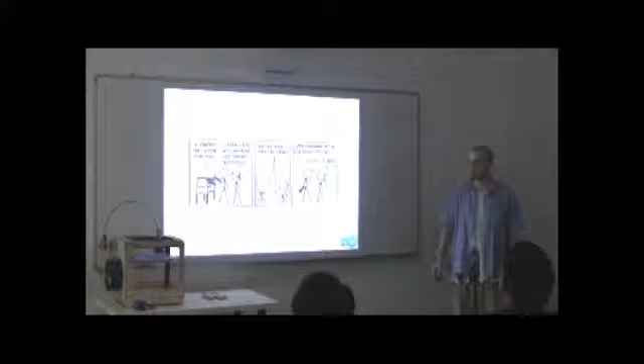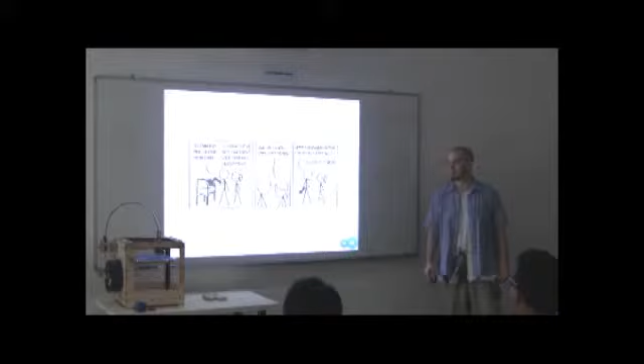On 3D printing, so I decided to essentially give everyone a crash course on what it is, the steps involved, and also the technology.

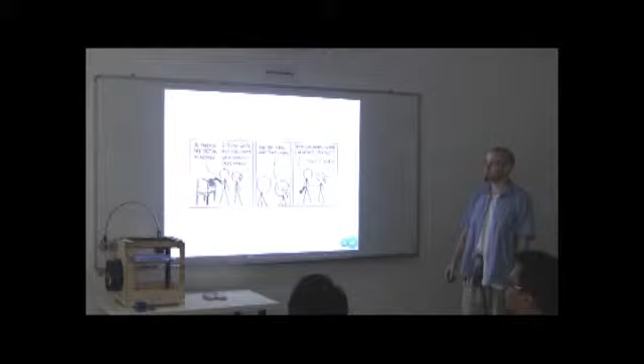Alright, so I thought we'd start with an introduction to 3D printing in case anyone doesn't know what it is. What's a bit older? Talk a bit louder. Sure.

Alright, so I wanted to give a quick introduction to what 3D printing is and why it's actually interesting, why it's relevant.

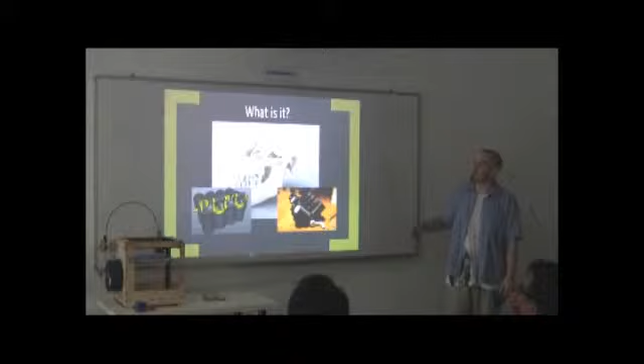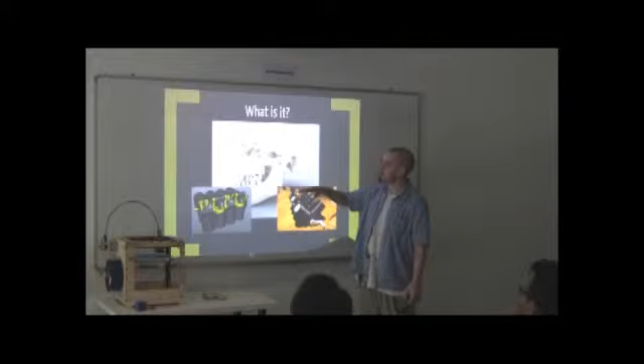So essentially 3D printing is the process of additively building a 3D model, typically out of cross sections. So we'll start off with a 3D digital design, something like the skull, and we'll build it up layer by layer. So here you see a skull which essentially isn't complete.

So it allows us to take 3D digital models and make physical copies, which is really useful for a lot of industries.

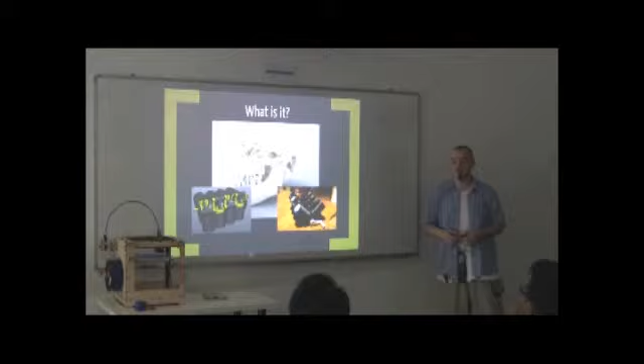Are those wood? They're wood, yeah, all of those. So CNC machines look very similar - they have some kind of cutting device to essentially remove material out of the block. It's just the opposite of additive.

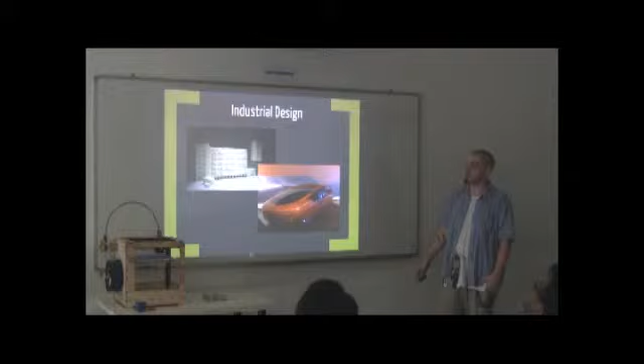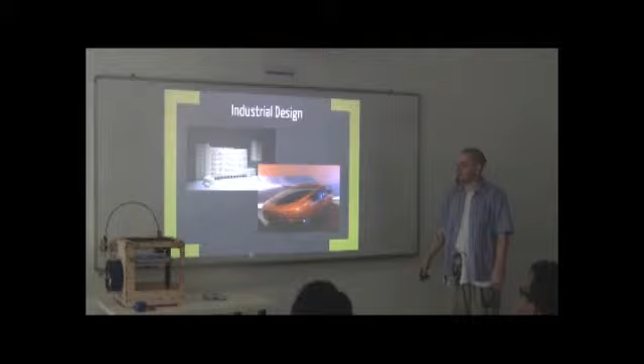So what's it good for? Well, industrial design was one of the first industries to adopt the technology. It's very common for architecture and also automotive design. Obviously car panels have lots of funny curves and stuff, so they're difficult to manufacture using standard techniques.

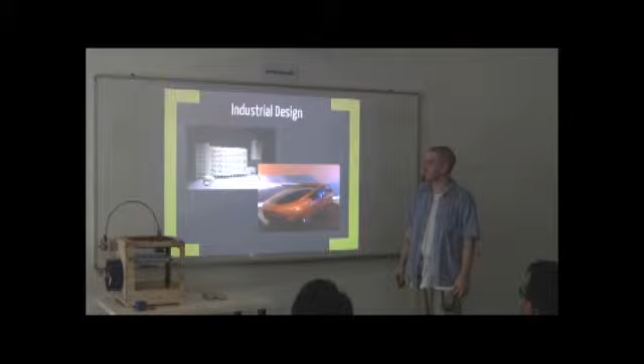So coming up with prototypes like this car, which is entirely 3D printed, is relatively straightforward with this technology.

What are the advantages of using a 3D printer versus whatever tools they used before? Essentially time. If you're wanting a short run, rapid prototyping, a 3D printer can turn it out in an afternoon.

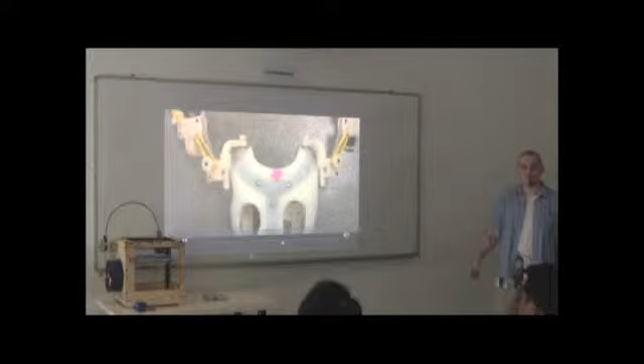Yeah, essentially as needed - it's not a large scale fabrication technique. If you wanted something where you want 10,000 pieces, 3D printing is not the way to do it. You can do something like injection molding, but if you want one injection molded piece, you have to pay thousands for the mold, and it takes weeks. So it's not a good way to test things out.

An example of replicating parts - the other day our 3D printer broke down, so Jeremy used the 3D printer to print a part for it. There's actually a clip back here which broke, and I replaced it with a printed part. I essentially jammed it in with hot glue just so I could then print that part and replace it with the actual thing.

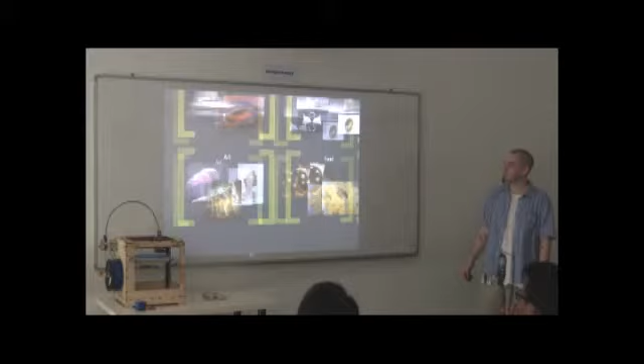So next we have art, obviously. 3D sculptures, characters from 3D digital models, all very cool. Food. Food is the interesting one.

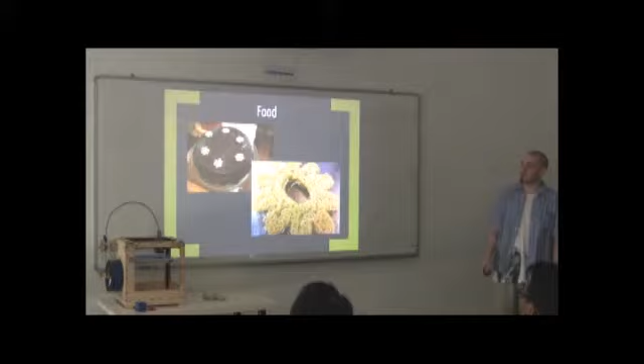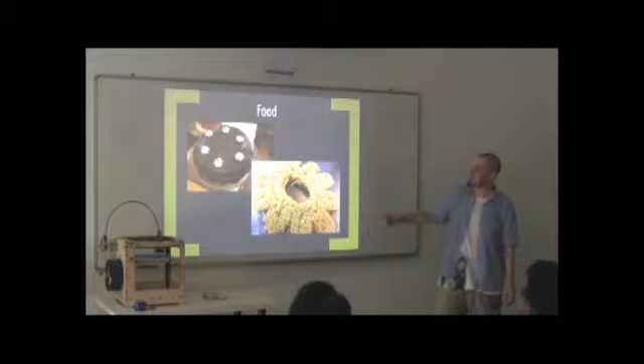So that's essentially a very quick overview of what 3D printing is, what it's used for currently. Next I wanted to give a quick overview of where the technology came from and also where it might be headed. As with everything great, it started in the 80s.

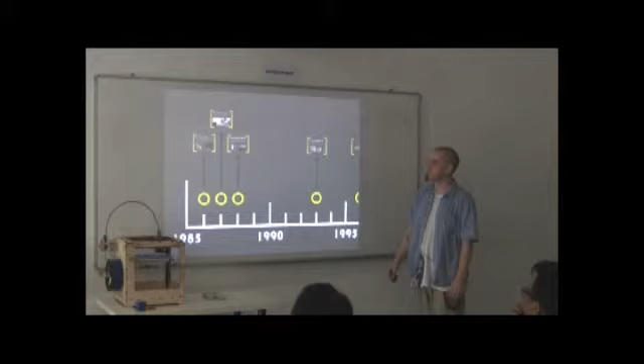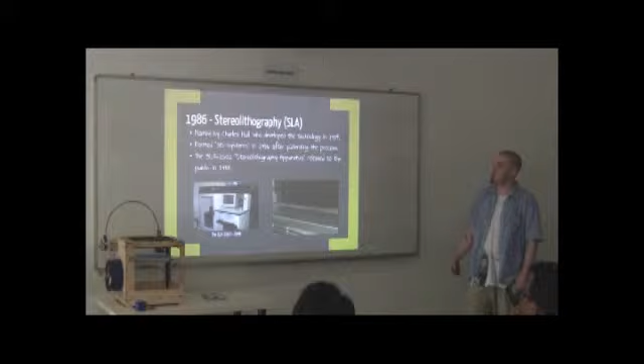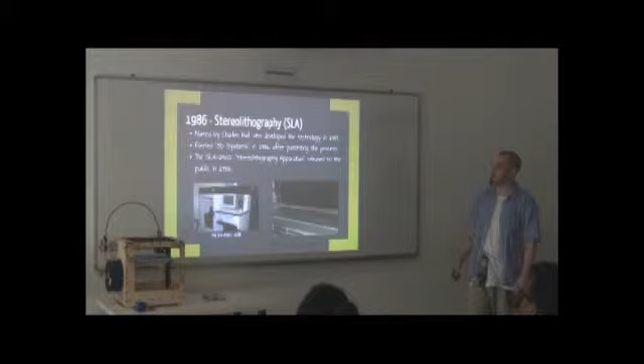In 1986, stereolithography was invented. It was developed by Charles Hull in 1984 and patented in 1986. He then went on to form 3D Systems, which is actually still around today, so we're using their printers. Based on a lot of feedback from their early test printers, which they only released to very select clients, they came up with the SLA-250, released in 1988, complete with an 80s computer and CD-ROM, of course.

So essentially stereolithography is a process which uses optical light, a UV laser, to selectively bond a UV reactive material. The material is laid out in liquid, and the laser then passes over the liquid and selectively bonds it wherever it hits. So it's a fairly expensive process.

There's obviously a lot of moving parts, and the material is expensive, so there are drawbacks, but it was still pretty good. Here we see a completed model - these are the areas that have been hit with the laser coming out of the liquid. It's also special lighting, because obviously you don't want UV to cure the edges, otherwise nothing comes out. These are automotive parts, car panels.

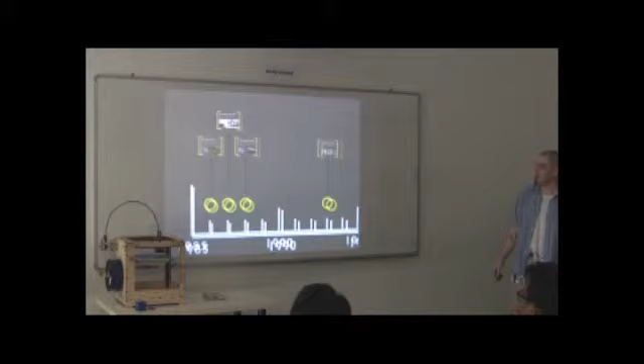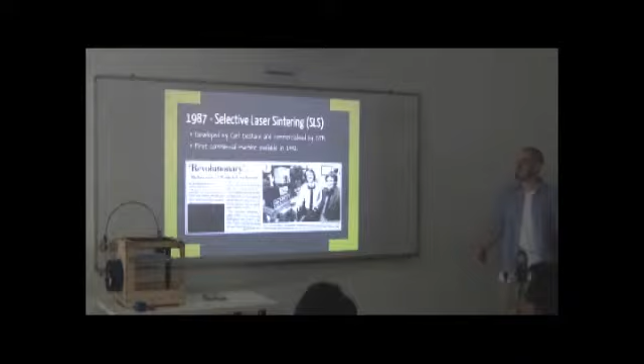Then in 1987, we ended up with selective laser sintering, done by Carl Deckard, this very small-looking chap. They produced the first selective laser sintering machine in 1992.

So laser sintering uses some kind of powder, and it essentially selectively melts the powder layer by layer using a laser - in this case, a carbon dioxide laser. It just creates layer after layer, which then fills up over time.

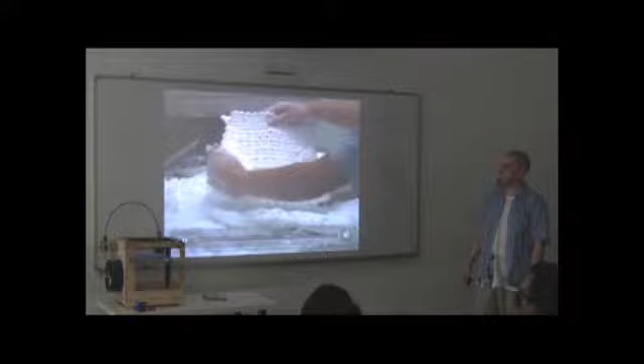Because it's in a powder, it's really good because you don't need support structures - essentially the remaining layer of powder, bonded or not, serves as support for the bond. So you just remove the bonded bits out of the powder that hasn't bonded, shaking all the bits out. Then they use something like compressed air to remove any excess powder from the mold.

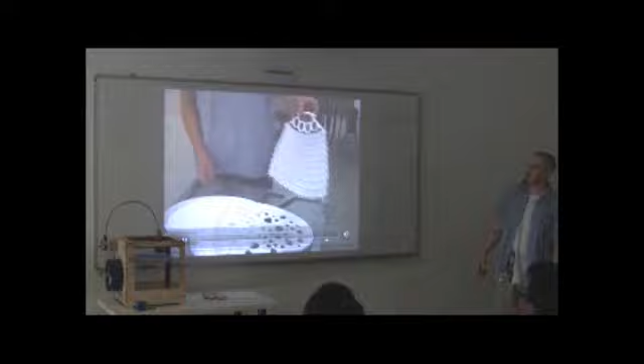And in the end, he ends up with a very sporty looking handbag. Just in case, for the woman.

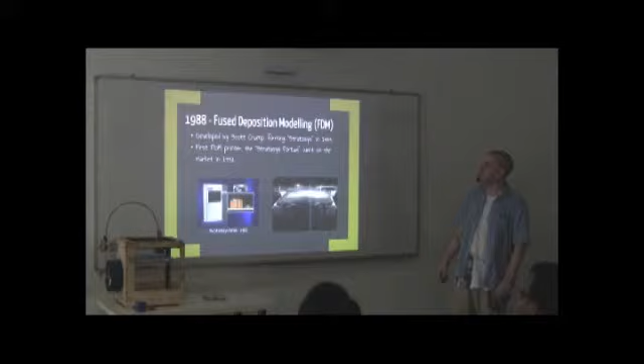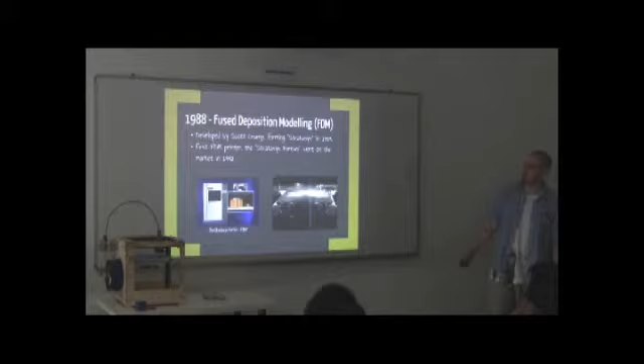Then by 1988, we end up with fused deposition modelling, developed by Scott Crump, who formed Stratasys, which is also available today. So Anna's Magic Arms were printed on Stratasys equipment. The first FDM printer went on the market in 1992 - there it is, complete with a blue neon gradient.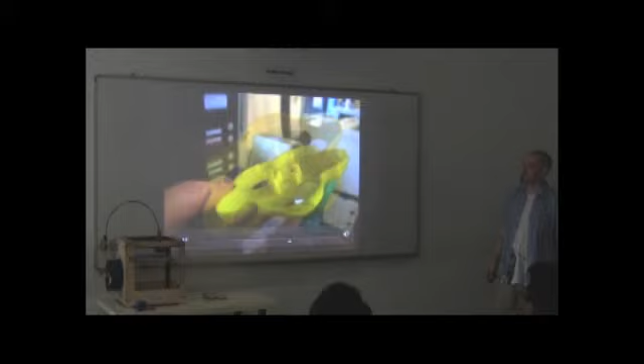So FDM uses essentially a hot glue gun to print out layer after layer of material, generally plastics - essentially anything you can bring to a molten state that will then harden when it prints. So this is printing some kind of funny object. You print the support structure initially because there's no layer of powder or fluid underneath to hold it up, and then that's removed from the structure afterward. I'm not actually sure what he's printed, but there you go.

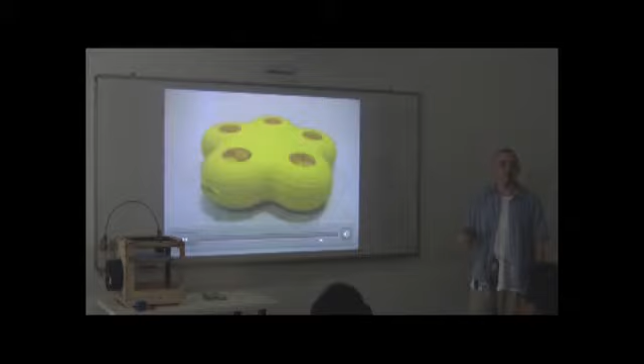So FDM is exactly what the Ultimaker is. It's a much more cost-effective way of developing a printer - there's a lot less moving parts, you're not having to use expensive materials. There's a lot of benefits to it.

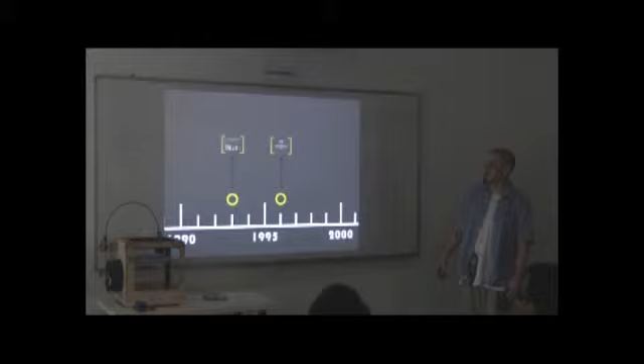So then we come over to 1993, where we end up with three-dimensional printing. This isn't '3D printing' - it's officially three-dimensional printing.

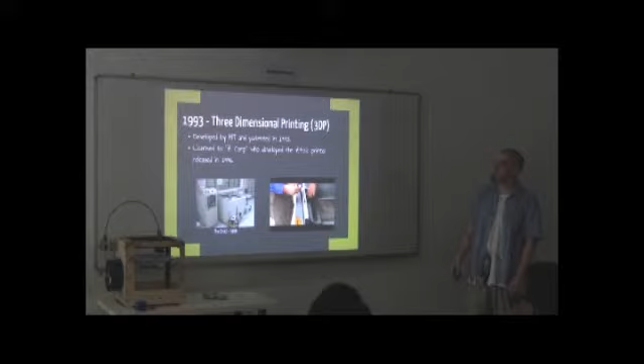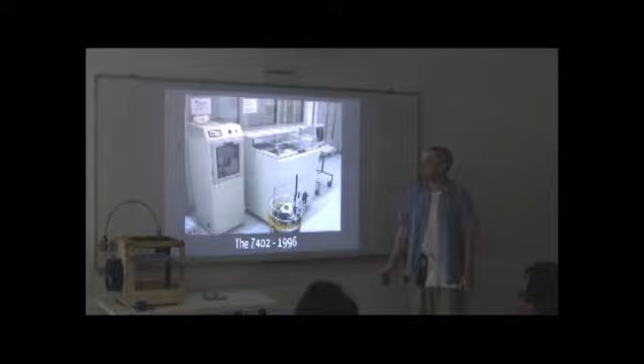It was developed by MIT, licensed to Z Corp, which is now part of 3D Systems. They developed the Z402, which was released in 1996. Essentially, it uses common HP inkjet cartridges. It prints on a layer of powder, essentially plaster with a little bit of vinyl.

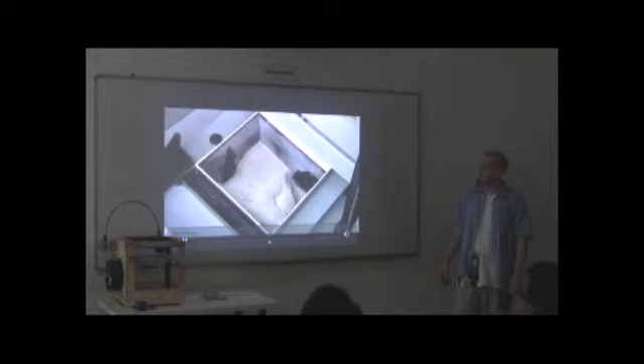It bonds the material selectively, a little like selective laser sintering, but instead of using heat to bond the material, it uses ink. Then the powder moves and you end up with the product. The really cool thing is you can print in full colour, so they can do some pretty cool stuff.

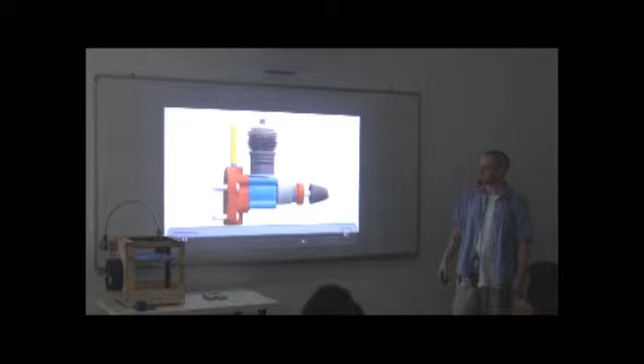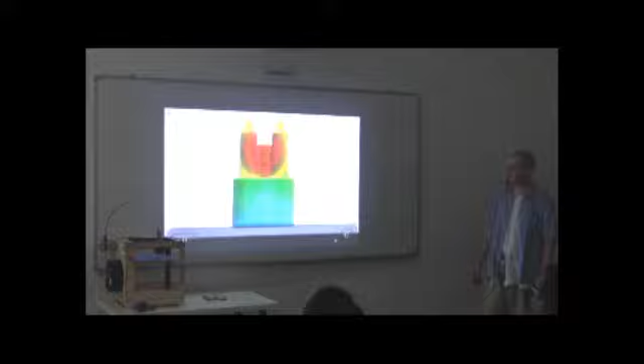So then in 1996, we ended up with the term 3D printing. In 2006, the RepRap project was announced. For those who don't know, the RepRap is the first open source 3D printer. It was designed so you could build it yourself, order a kit, that sort of thing. Before then, it was essentially only for industrial use, large companies. So this was a big deal.

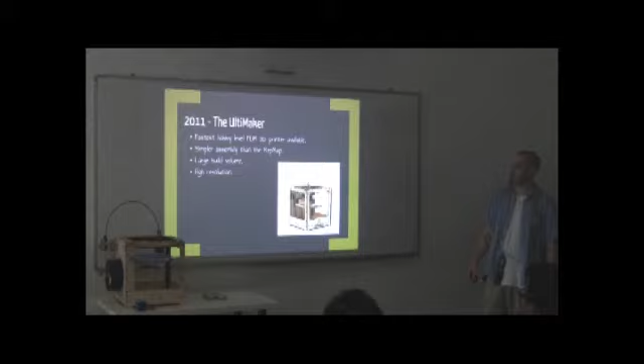Then in 2011, the Ultimaker came along. It holds a few records still — it's the fastest, and it definitely has a simpler assembly than the RepRap, which was notoriously difficult to put together. It has a pretty large build volume and it's quite high resolution.

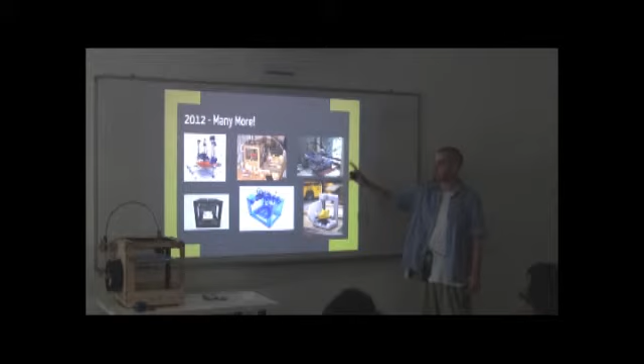Then 2012 comes along and we end up with an awful lot more. This is essentially the great grandchild of the RepRap — that's the Airwolf, there's the Megabot CNC, and this is the Solidoodle, which comes fully assembled for about 500 US.

The Fab at Home uses syringes rather than any kind of specific heating element, so you can essentially print whatever you like. You can get it in a syringe and print it — icings or cookies, that sort of thing.

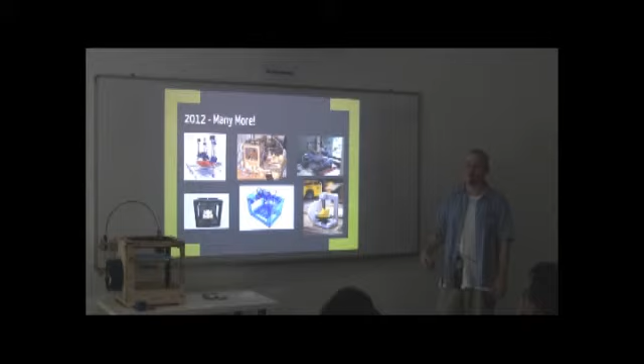And this is the Cubify, which is designed to be idiot-proof — essentially the Apple of the home 3D printers. It comes ready to print and requires almost no maintenance. Not the greatest printer, but good if you're not certain, not technical.

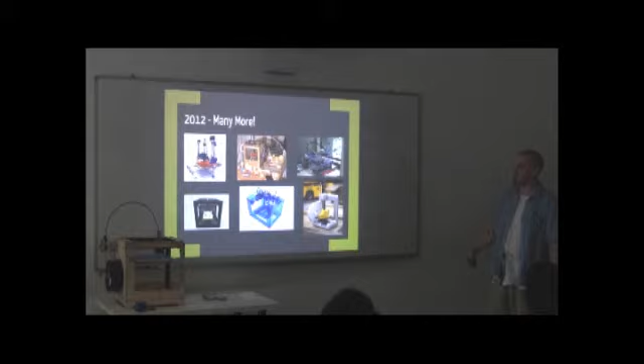As for the future of 3D printing, we end up with something called bioprinting. This is human skin, essentially printed layer by layer using skin cells. The idea is you'll be able to print skin for burn victims or a wide variety of other conditions and graft it onto the patient.

The ultimate aim is to be able to print directly on the patient — that's obviously the goal. After that, we move on to other areas of bioprinting, which is the attempt to print other organs — kidneys, hearts, that sort of thing.

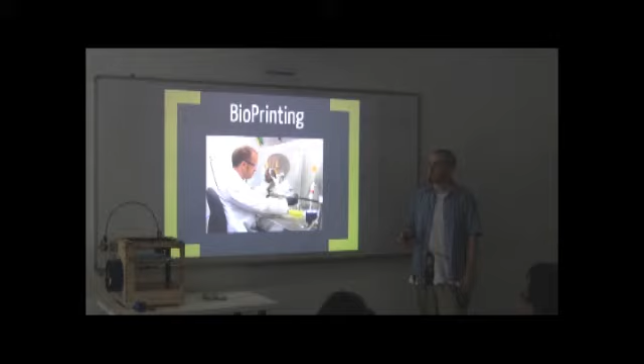It's actually relatively straightforward to print living tissue — printing kidney cells isn't that difficult. What's difficult is keeping the kidney alive while you're printing it. One of the real issues is blood supply: you're not supplying cells with oxygenated blood, so they die very quickly.

So here are some guys using a modified RepRap. They're printing sugar matrices so that they can essentially develop blood vessels during the printing process. This way you can pump blood into the cells while it's printing and keep all the cells alive during the fabrication phase.

So here he is printing the sugar. They then inject a gel solution which essentially forms around the sugar. They dissolve the sugar and you're left with blood vessels.

After that, we move on to food, which is a related topic. I showed you some earlier examples of printing for food. There's a company called Modern Meadow — they recently got quite a bit of funding from the PayPal founder. They're wanting to print meat from scratch.

Producing steak has a pretty catastrophic environmental impact. Livestock are really, really bad for the environment, and as the population grows, either we all turn vegetarian or we start eating printed meat. That's the idea.